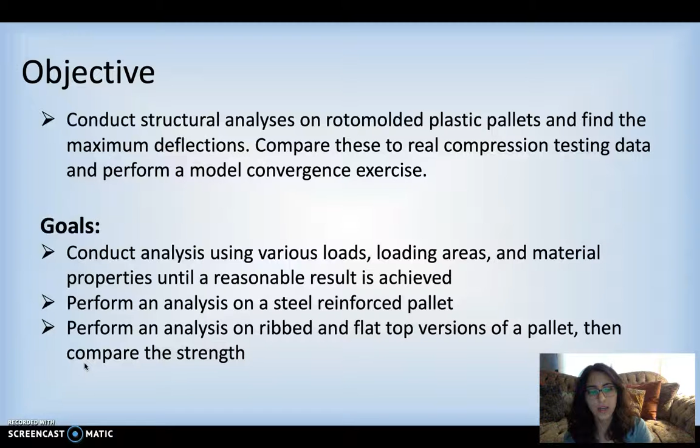The second goal was to perform an analysis on a pallet that has steel reinforcements. So I knew that that would allow me to use ANSYS contact features and the multiple bodies and just see if I could get an analysis that actually made sense. The third goal was to perform an analysis on one of our pallets that is ribbed and see what the difference would be if we were to remove those ribs and just have a flat top pallet, how much strength loss would occur. So those were the three biggest goals that I had.

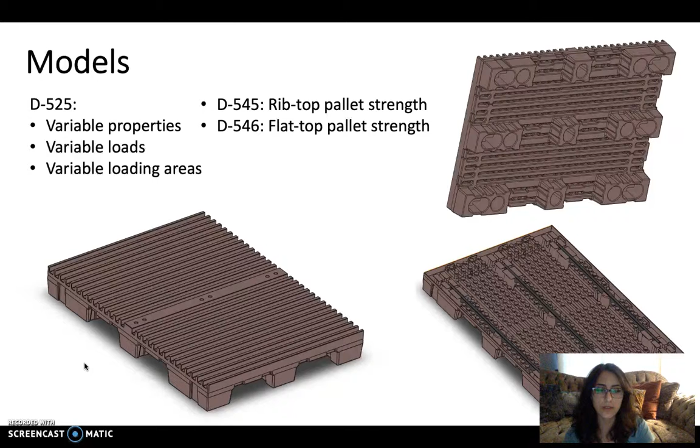I have three models. The first model is the D525. This is one of our smaller pallets. This is the one that I wanted to do the smaller tests with, such as the variable loads, loading areas, and variable material properties. The D545 is one of the pallets that we have standard right now, and that is the ribbed top as you see in these images. And the D546 is the same pallet design with just a flat top, so everything else remains the same, all the dimensions are the same. And both of these pallets have steel reinforcements, whereas the D525 does not. So I knew that the D525 would be easier to do the quick tests with.

So for my boundary conditions, these were pretty much the same for all of the pallets except that the loading area did change. I did an offset load to one side and it was about half the area of the pallet. The fixed supports were the same for all of my analyses. It was just the bottom surfaces of all the legs.

And the mesh for the D525, which is what you see here, was a little bit large. It was not really complicated. I did a lot of cleaning of the model itself and removing a lot of the fillets that were not going to affect the strength of the pallet. And I just wanted to get the analysis to run a little bit faster. So I didn't use a really complex mesh on the D525, which is the one without steel.

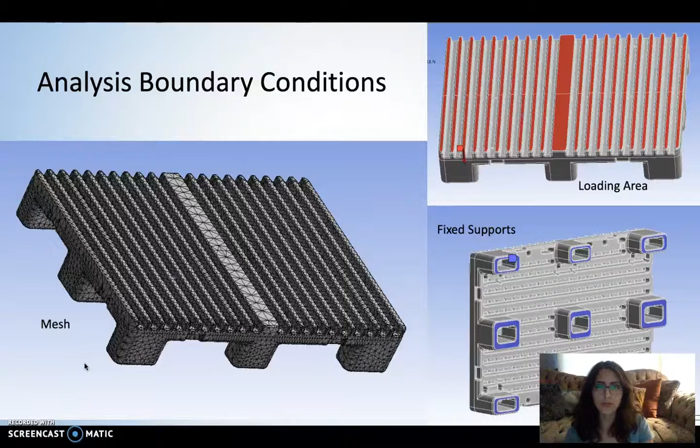I did get the chance to check and see if my fillets were going to be critical or not, and you see in these images it's very clear on the right side, which is the stress plots, that the fillets near the legs on the inside where the brightest colors are actually pretty critical because you can see that there's more stress concentration happening there. On the left, these are the deformation plots, so that's the half area offset and then the full area load. So you can kind of get an idea of what the deformation would be.

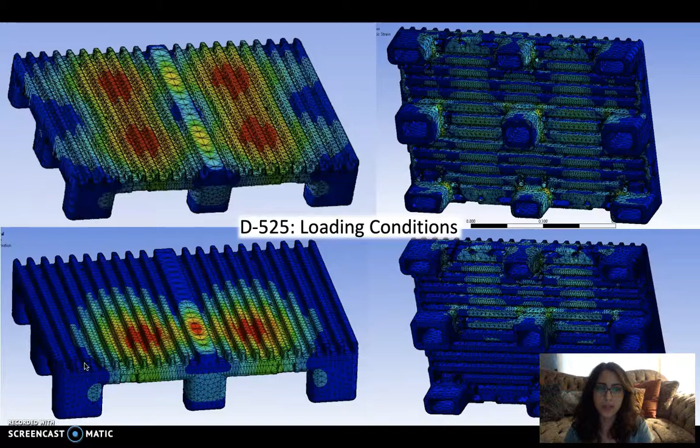And these were done with various loads, so I did 1,400 kilograms and then 2,300 kilograms, so we'll get back to that in a second. I was not getting close to my real-world data, so I started looking at my material properties. After I edited the mesh and the models and everything else that I could, I realized that our material properties may have been having the most effect. So the published properties from the actual polymer manufacturer that we use had a flexural modulus of 603 megapascals.

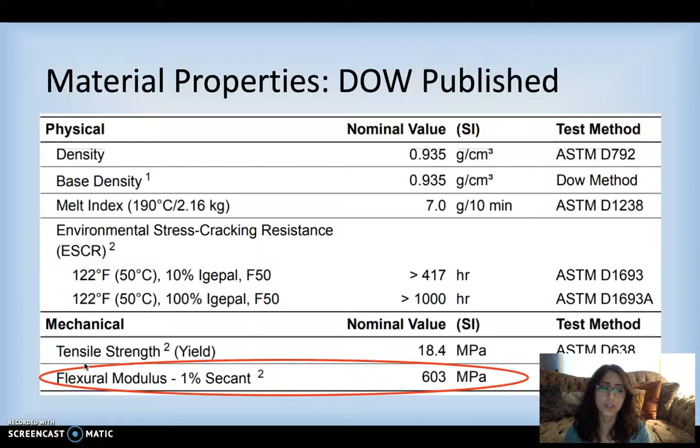So we also had data from the guys who buy this polymer and then distribute it to us. So our distributors had data that did not match the manufacturer's published data. So their stress strain tests that they did, we had actual data sheets with all of their stress strain curves, and I did a quick analysis to find the slope, and I found that that was 285 megapascals. So that is quite a bit weaker and would have a lot more deflection.

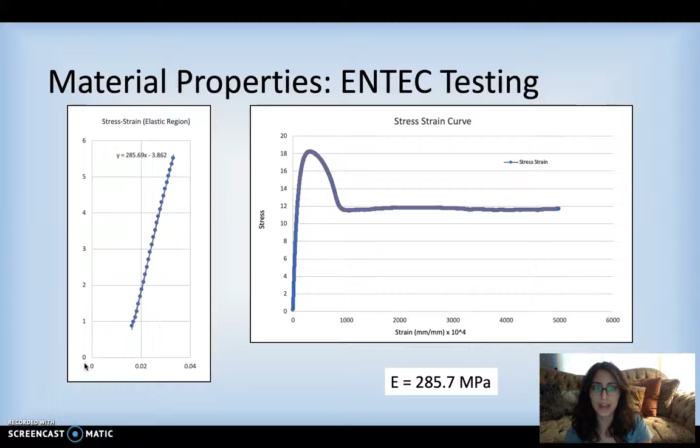It's not an insignificant amount, so that was a little bit troubling, but I wasn't convinced that our actual polymer was that weak, and so I don't know if they sent us the wrong data. They sent this twice, so I'm not sure what was going on there, but I went ahead and did analysis with this to see what that would come up with.

So on top you see the published properties, which is giving us a deflection of about 9 millimeters, and then the distributor's incorrect data that they sent, which would give us way more than double that. So that would be very bad, and that's not something we want. So that is not what we were seeing in real life. We were actually seeing quite a bit less deformation than this in both cases. So there was still something wrong with my models or my analysis using the published properties. But it is pretty interesting to see the difference of what just the modulus can do in your analysis.

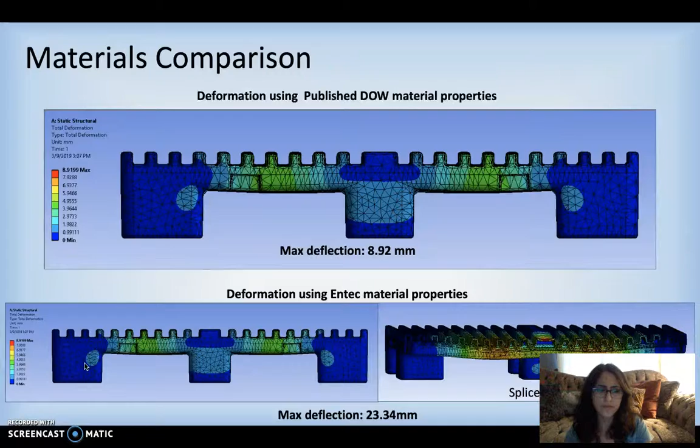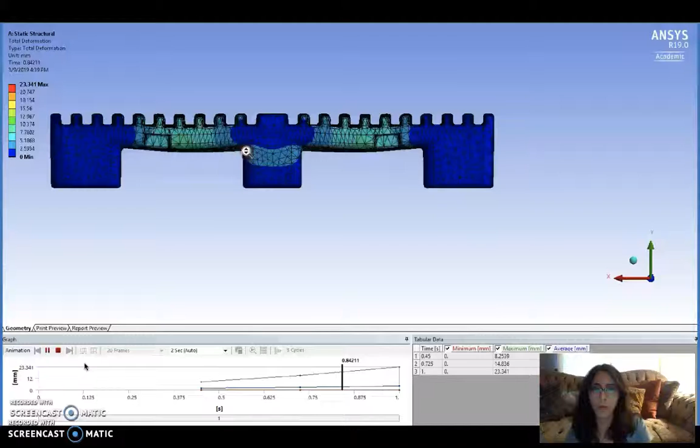So here's a video of the pallet with the Dow properties, which was the 600 megapascals, and you can see the 9 millimeter deflection happening. And then there is the distributor's data, which had a much lower modulus, and you can see the pallet does deform quite a bit more. This is pretty interesting because when our pallets are in the compression tester, they really do tend to deform like this. So I was happy to see that it really was looking the way it does when we test in real life.

So that brought me to our manufacturer. I wanted to get data straight from them. I wanted the raw data from them, so I jumped through a few hoops and got data from the actual polymer manufacturer. And this data was right off the bat clearly more detailed. They had a lot more test points and a lot more tests that they ran. And I then compared that to their published secant modulus, which was a 1% secant modulus. So I took the same one, and that came up with 970 megapascals, which is much higher than their published properties.

And thank you, Dr. Zhang, for helping me with that, because I did not know how to take the secant modulus before this time. So that was very helpful.

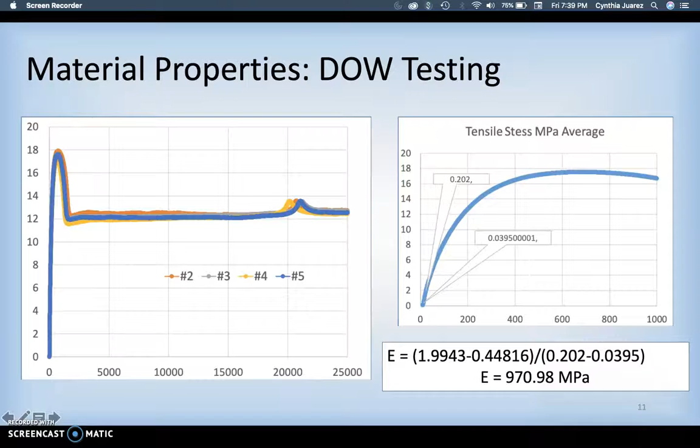But yes, this is quite a bit higher than what we had in the published documents. So I went ahead and tested with that, and it turns out that my test actually got much closer to reality that way. So the polymer that we order is supposedly a medium density polyethylene, but that modulus matches better with a high density polyethylene. So I'm not sure if we are getting a higher density polyethylene than we thought we were, or really what's going on there, but it did make my analysis match much closer to reality, and it really wouldn't be that much of a surprise. We're not real picky about our polyethylene.

It does need to be strong enough, but it being a little bit higher density would not be troublesome, but being lower density, the 285 megapascals matched closer with like a linear low density polyethylene, and that is not something we would want to manufacture these pallets out of. So here I was getting a deflection of about 3.1 millimeters in my analysis, and our real-world testing data of the same pallet under the same loading conditions was about 2.7 millimeters, so that is pretty good. I was happy with that. This was under 1,400 kilograms.

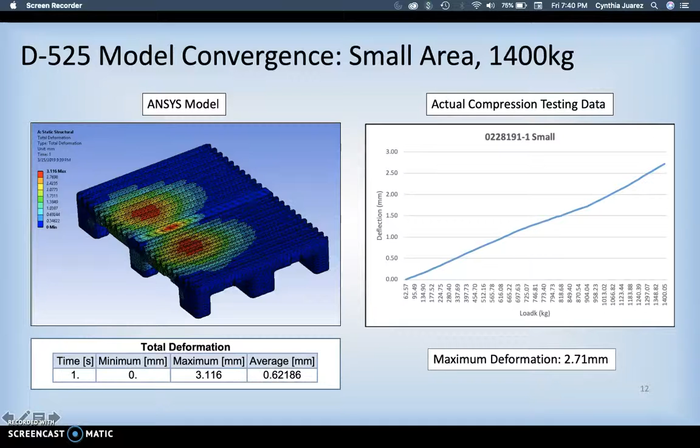I ran it again with 2,300 kilograms, and I also got a good result. My analysis came out with 5.2 millimeter deflection, and our compression testing data had 5.2 or 5.02 millimeters. So there is a bit of a difference, but not bad at all. I was really happy with that.

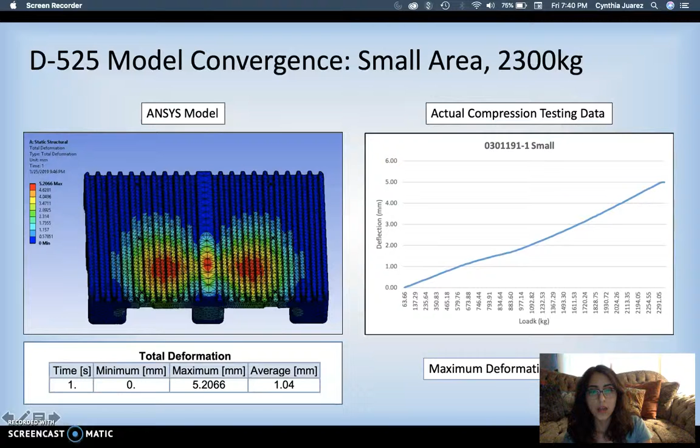So that brought me to the D545 and D546 steel reinforced pallets. Now that I knew I could validate a simulation, I wanted to validate the D545 and then go ahead and remove the ribs and test it again on the flat top version and compare the strength.

So the ribs add a lot of strength to our pallets and they're pretty important, but certain customers want flat top pallets for their shipping purposes, and manufacturing one of these is a little bit tricky, so we don't want to lose any strength when we do that, but it's kind of inevitable. So we just want to know how much that would be.

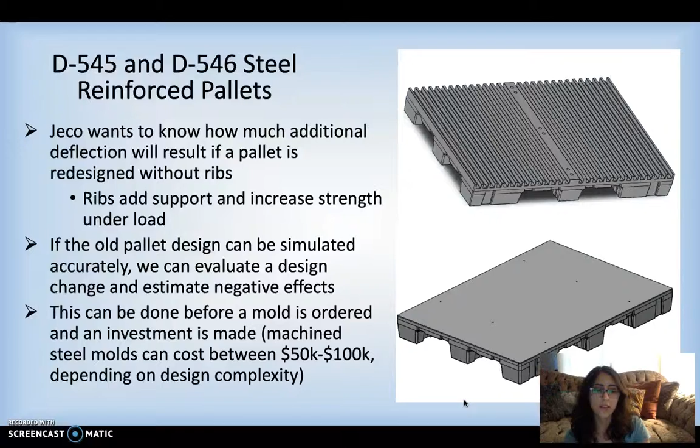Making a mold for these pallets is about $50,000 to $100,000 depending on how complex the model is. And so it's not a small investment, and we kind of want to know before we get into it, are we losing too much strength that it's not even worth it? So this was a very good exercise that I really enjoyed.

The mesh for these, I spent a little bit more time on. I did much more complex mesh boundaries here, or whatever you want to call it. I spent a lot of time on it. So I used a much smaller mesh. I kind of went out and investigated in the warehouse to see, was the steel really perfectly bonded to the polymer? Was that appropriate to use for my mesh?

And some of the engineers said, yes, you can just consider it perfectly bonded. The steel is not going to move. And then our warehouse guys who work with these pallets every day said, no, you can hear the steel moving around. If you load the pallet, the steel doesn't move the same way.

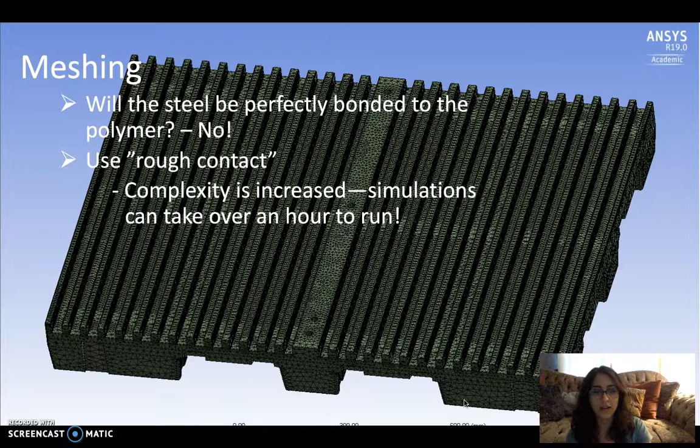So I ended up going with a rough contact because I figured the polymer does move around the steel a little bit. It's not completely stuck together, and if you load the pallet, it's probably going to move a little bit. So this really, really increased the complexity of the simulations. Doing a rough contact takes a lot more time, and it's a lot more solving involved. So that took over an hour to run any one of these simulations with the rough contact.

So that came up with a 1.2 millimeter deflection. That was a full area under 2,500 kilograms, and this I then compared to the flat top pallet, and that came up with 4 millimeters. So that's a big difference, but it does kind of give us an idea of what would be the result of removing the ribs.

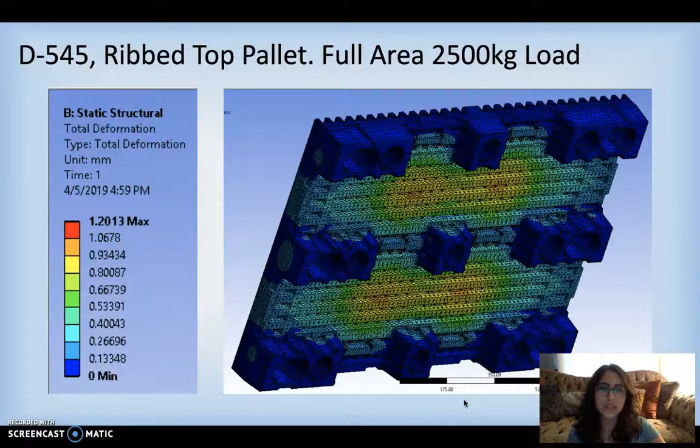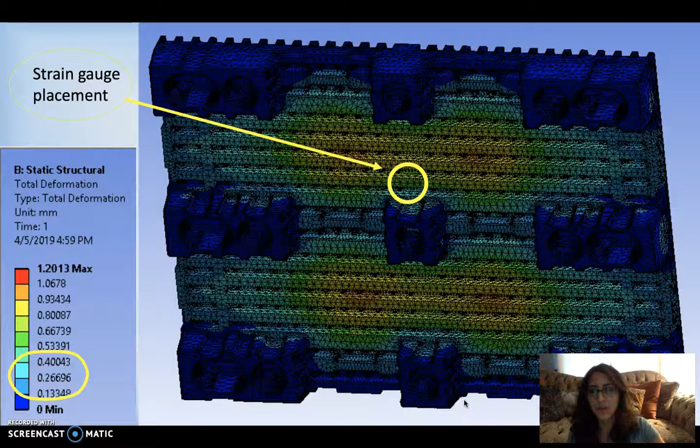But I discovered that he actually places the strain gauge, in this case, close to the center leg. And I'm not sure why. I think it has something to do with the steel frame. He said that's where he puts it. And when you actually look at the deformation plot on my simulation, you see that it fits relatively well with that. It's somewhere in the 0.1 to 0.4 millimeter range if you place it where he puts his strain gauge.

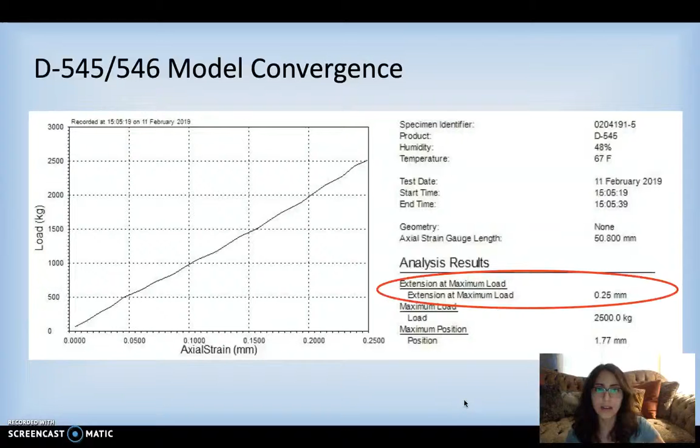So that fits a little bit better with what he was getting from his actual compression testing, and that made me very happy. So we can trust this flat top pallet simulation a little bit better knowing that. And I did spend quite a bit of time editing the meshes and editing the boundary conditions and getting everything right, so that was very nice to see.

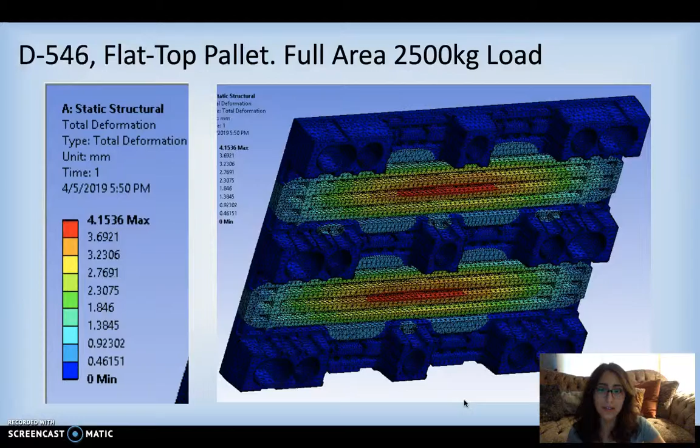Finally, I wanted to talk a little bit about why our tests do not always reflect reality. So in our standard compression test, and like in my simulations, I fix the bottom surfaces of the legs. And so I can reflect one of our simulations in the compression tester where it's just a flat area load.

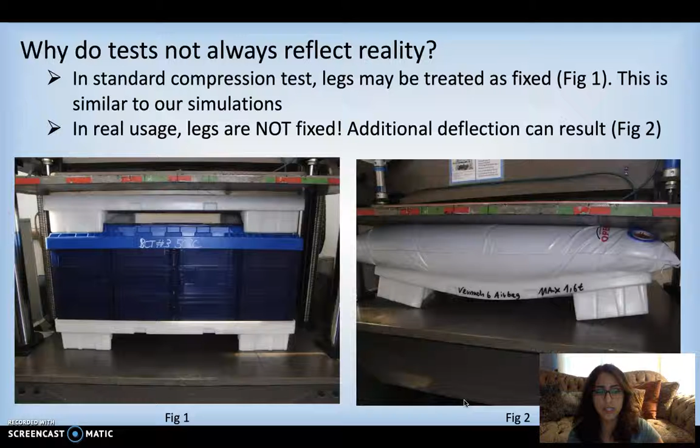But in real usage, and when we put something in between the compression tester to get a better idea of what's really going to happen when they load it with an uneven load, you see that the legs actually lift up and the deflection increases. So the legs are not fixed in reality when customers are actually using our pallets. So that's something to think about for future simulations.

My conclusions are that the model convergence exercise was successful. My results were within 5 to 15% of the actual testing data values, so that was really good. I spent a bit of time getting it closer and closer, and I'm pretty happy with where I ended up.

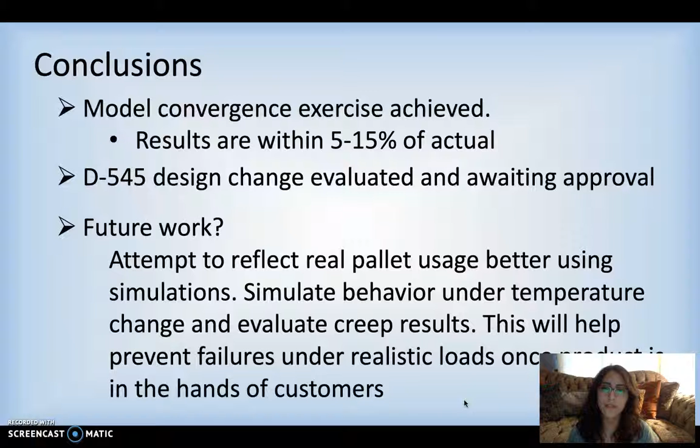The D545 design change to a flat top is awaiting approval, and as far as future work, I think simulating creep and just trying to reflect more real-life loads would be pretty interesting moving on.